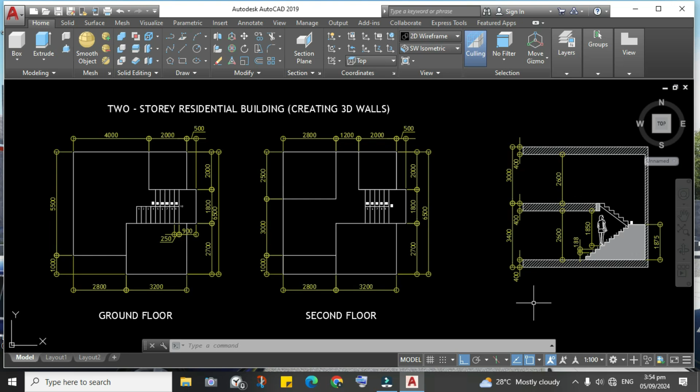Before we start, we need to set up our AutoCAD program. Look for the 3D modeling mode by clicking the WS current, or workspace setting. Be sure that you're using the 3D modeling mode, not the drafting and annotation mode. Also, be sure that you are using the ACAD ISO template. To check, press Ctrl N, then select the ACAD ISO .dwt file, without the file extension shown.

Since our target is to convert this into solid, you need to use the polysolid command. Just click this icon, polysolid, or type polysolid. Press enter, then modify the height. Since our ground floor must be 3,400 in height, set that value. Then for the width, set the value to 150, and press enter. For justify, just set the default center, and press enter to accept the default setting.

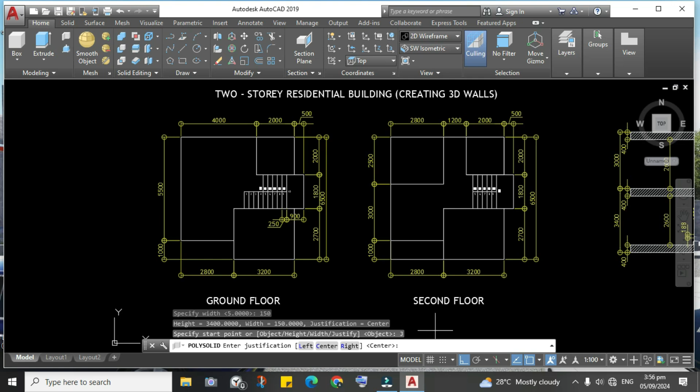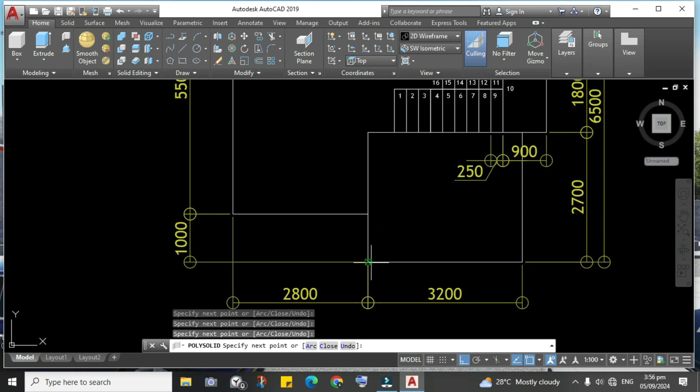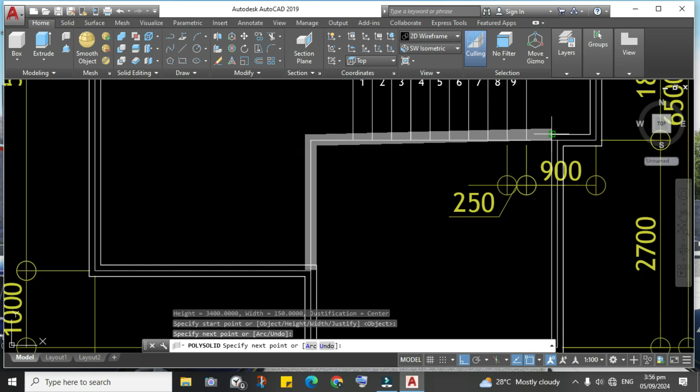Start by picking this endpoint or corner, then trace all the necessary corners in this manner. Once you reach this area, type C to complete the wall. You may continue doing the rest of the layout by pressing spacebar to activate the previous command, polysolid. Again, spacebar to activate the polysolid command, then press enter to end the command.

Let me continue. I need to type the command polysolid since I need to modify the height. So, polysolid, enter, then check the height. Since it is 3,400, I will now change the setting to 3,000. Then let me also check the width—it's 150, I'll just accept it by pressing enter. Then for justification, I'll check if it is on center, then accept it if it is already the current setting.

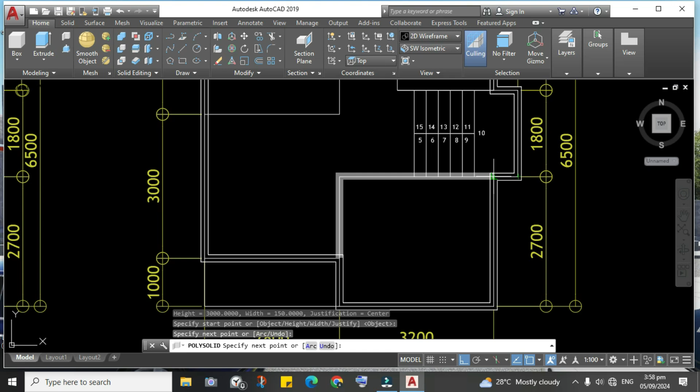Let me now pick this endpoint or corner, then continue tracing all the necessary points in this manner. Then type C to close. For the rest, you also have to press spacebar or the enter key to activate the previous command. Press enter to end. For this area, I'll just press enter, then continue. Again, in order to activate the previous command, you just have to press the enter key or the spacebar.

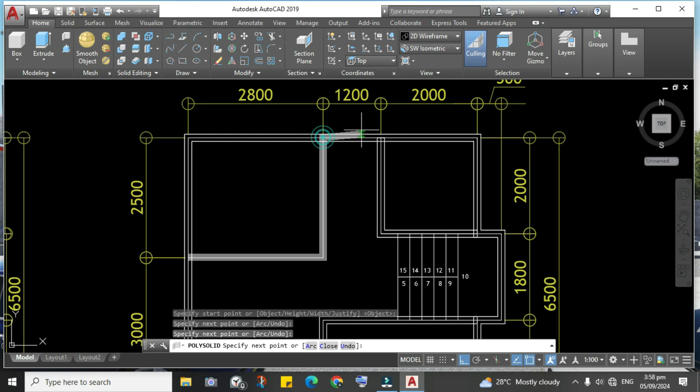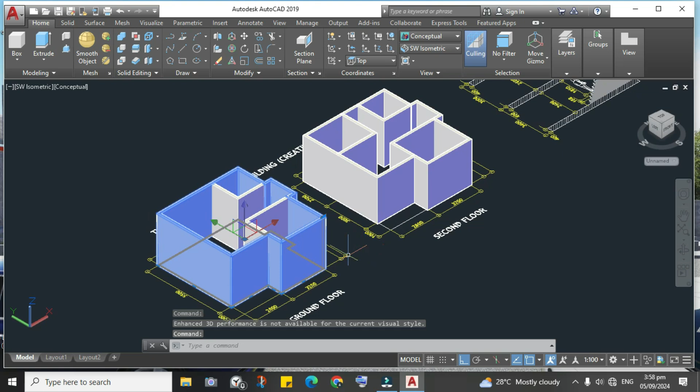As a result, once you check the southwest isometric and the conceptual setting, we will now have this kind of result. The height of this wall is 3,400, and this one is 3,000.